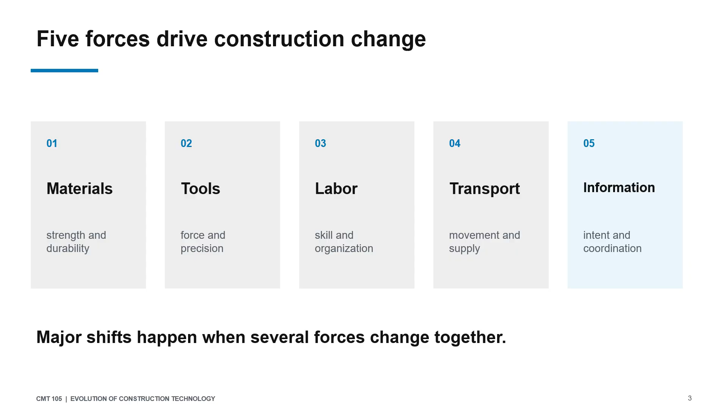All right, so let's get into the general timeline here, right? This is a pretty broad timeline. It's really not a straight line though. Construction history doesn't follow that straight line pattern, where one era just suddenly replaces another.

Ancient masonry practices are still used. I got a mason here, right? Who's my mason? Got a mason, yeah. So there's still some things you do that have been done for a long time, and it hasn't changed because you don't necessarily need something new. So we've had things that are consistent across the board.

Builders used to develop durable systems around local materials and accumulated craft knowledge. The industrial era really increased production and transportation, making components and machines available at new scales. 20th century construction mechanized, with standards and codes. I hate codes. That slowed a lot of stuff down, but that's right. Standardized codes, highways, utilities, large organizations came into play that impacted how construction had to get done.

We used to live in the era of what they called the master builder. I remember learning about this even in architecture, that it was more this master builder and master craftsmanship quality that came to buildings. Whereas once you started getting organizations like the AIA and different code officials and all these safety procedures, which are all good things, there's nothing wrong with them.

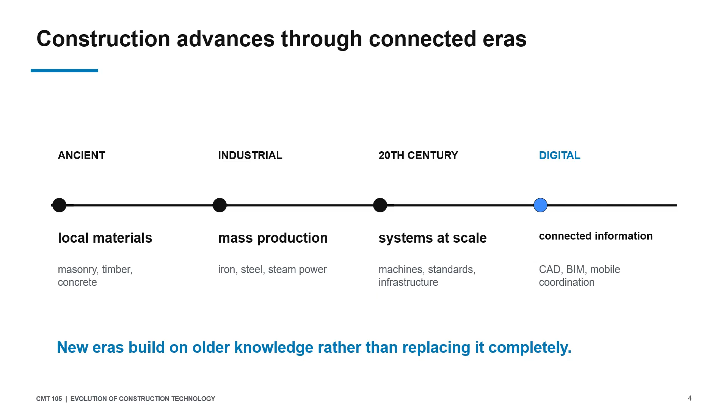So maybe some fun examples, some things you might be familiar with as we're working through here. If you don't know, this is the Pantheon. It's a powerful case in material and technological advances, right? It combines material, geometry, temporary works, and a real construction sequence. This was dedicated back in 128 CE. It still contains the world's largest unreinforced concrete dome. Kind of crazy to think about that, right? This was built a long time ago, but still is the largest unreinforced concrete dome.

It's not simply a giant mass of one concrete mixture. Roman builders reduced the weight towards the oculus. They actually changed the mix of concrete as it went up towards that big opening, the oculus at the top. They changed the aggregate. They changed the thickness of the concrete. The geometry also directs the compression through the dome and into the supporting drum, right? So there's a lot of structural engineering to this in a sense.

But even imagine this building, okay? If you've seen pictures of this, a very large building, huge oculus. Think about the complexities of that even with modern day tools, with concrete pumps that can pump concrete up to high heights on multiple story buildings. Think about that back then. They didn't have concrete pumps. So how did they move material around? How did they actually mix? They didn't have mixing trucks of concrete coming to their job site. They had to deal with it on site, right? So think about the volume of material that was used to actually do this, and what they actually had to deal with back then.

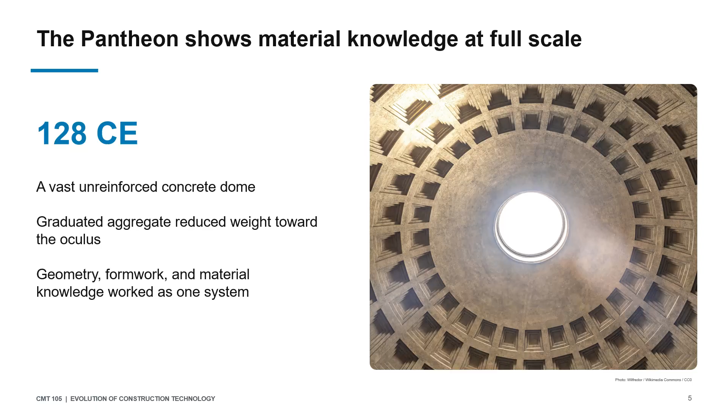The lesson here, I think, is that material innovations themselves are rarely isolated, right? Concrete enabled the dome, but formwork, geometry, aggregate selection, logistics, and accumulated craft knowledge made the concrete usable at this scale. So lots of things went into this. It wasn't just one thing. It wasn't just a material. It wasn't just one way of working. Lots of different elements played into this. And again, no computers yet. We're not there yet. Okay.

Here's just some ideas. The idea of concrete itself is always looked at as a pretty big historical technological change, right? In some of your readings, we looked at an example where MIT researched or revisited a detail that earlier observers often treated as evidence of poor mixing. They looked at these white lime clasts inside Roman concrete, and their analysis suggests that Romans used quicklime in a hot mixing process, and that process formed reactive calcium-rich features within the material.

The proposed self-healing mechanism works like this: a small crack develops, water enters, the water reacts with the calcium source in a lime clast, forming calcium carbonate, which then recrystallizes and fills the cracks. In the laboratory tests described by MIT, cracks in hot-mix samples healed within two weeks, to the point that water no longer flowed through them, while comparison samples without quicklime did not heal in the same way.

The important thing to think about here is not that we should simply copy an ancient recipe. It can really inform what's going on, but now with new technology, we're able to re-examine some of the things that worked well or some of the things that failed. With new technology, we're able to go back and study why that worked well, or why we had problems with certain things.

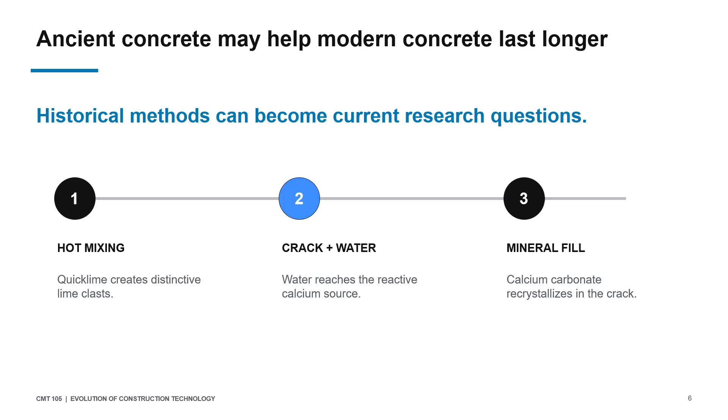Concrete can make or break a job. That's a big deal. If scheduling's not done right, if you have a bunch of concrete trucks coming to your job site one morning and your team's not ready to go, you could waste a whole lot of money because concrete is on a deadline. Those trucks come ready to go. They don't have time to sit around and wait. You can't tell them to come back tomorrow. So there's a lot of sequencing that has to go around this type of stuff too.

So, speaking about iron and moving forward into the industrial age, and thinking about how iron influenced design and shaped things over time. This is an example of the Iron Bridge in Shropshire. I can never say it correctly. This opened in 1781, so a lot farther forward than the Pantheon. It became an early demonstration that cast iron could serve as a primary structural material at an architectural scale. It spanned the River Severn using cast components produced in an industrial region known for iron making. So again, finding the right skilled labor that could actually do it.

But look at the form we've got going on here. The bridge is iron, but many of the connections resemble timber joinery. Some of that looks like stuff you would see in a wood building. Oftentimes builders understand a new material by adapting familiar forms and methods, and that can help innovation become buildable, even if later engineers discover more efficient ways to use the material. You might look at that now and think it's kind of ornate. Those joints are more ornate, more visually pleasing, where you could easily accomplish that nowadays with steel L sections.

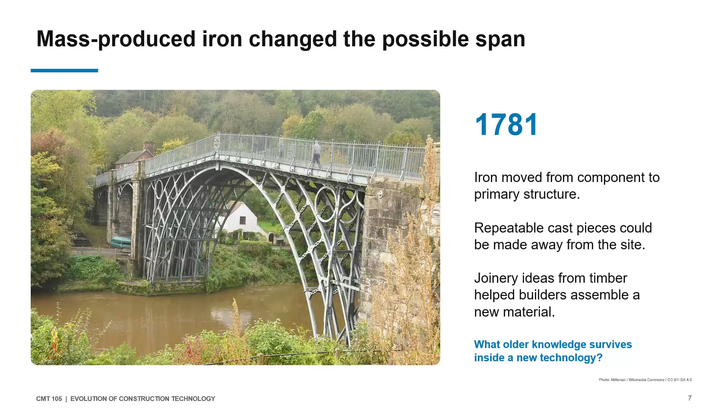Okay, questions so far? Yeah, doing good. Staying with me. I know it's history. You didn't think you were gonna have a history class in here, did you? But it's part of it. We have to understand kind of where we came from.

The big problem they had here was industrial fire risk. This was a textile mill at the time, and they always contained highly combustible fibers and relied heavily on timber floors and framing. Replacing the key structural members with iron reduced the amount of combustible structure, right? So being able to move from a lot of timber to actually using a lot of iron in here was able to help lower that risk of combustibility.

So the longer term significance here is with the frame, right? So we also now are looking at using a skeletal structure. So not relying on the exterior members to support the overall building, but now you have a skeletal structure inside the building that's actually carrying the weight of the building. Later builders could really refine that material, the connection, the fire protection, and the load analysis, eventually using steel frames to carry tall buildings, while exterior walls became lighter enclosures.

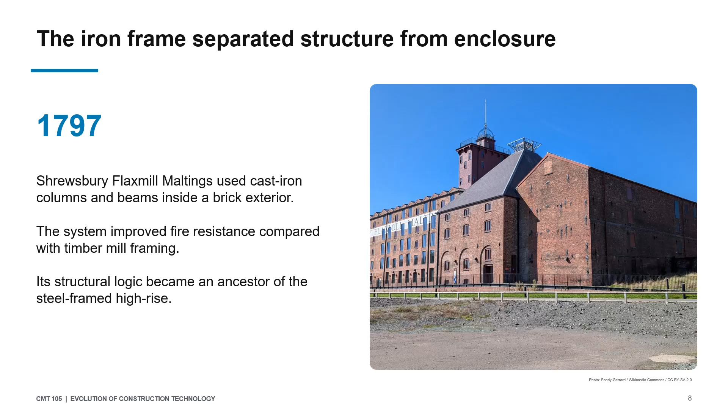So when you're looking at the written assignment, I want you to think about how some of these projects have a layered approach to the technology evolution, right? So it's not always just, now that we had software, we were able to do this. But think about some of the other things that were technological advances in that building specifically, and how it maybe changed things in a layered way of looking at it.

Okay, so this is steam power. If we're looking now at the idea of internal combustion, electric engines or electric machines changed the effort level that we have on construction job sites, right? So excavation is a clear example. When you think about hand excavation, people having to move earth and dirt around job sites requires a large workforce, and they're able to move relatively small amounts of material, right?

In comes the steam shovel when it was early invented, or now we have massive machines that can move absolutely metric tons of dirt at a time, that are able to change the way we work and move things further, right? But again, things like the steam shovel or the mechanical equipment we have today require a skilled operator, so someone has to be trained on that machine to be able to operate it.

There's still a human that's involved in that. There's fuel costs now to it, maintenance costs to it. You have to transport that equipment. So this equipment's large. You have to get it to a job site. It's not just your workforce showing up, and now you've got to get large pieces of equipment transferred from one job site to another. So that comes into play. And again, you have to make sure you have work plans that are actually suited to the machine, how it can move around the site. All of those types of things have to be taken into consideration.

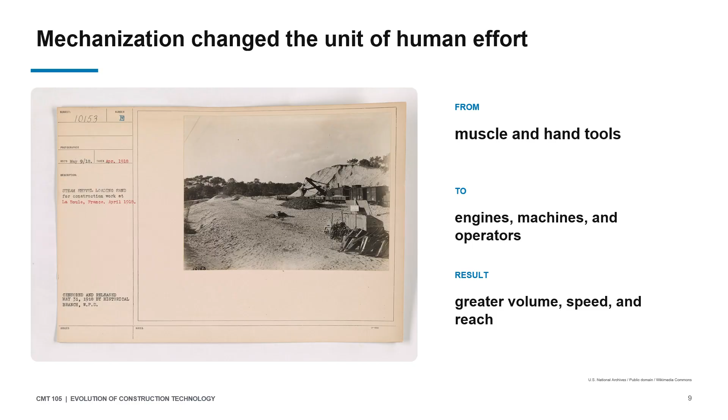So the thought there is, well, there's certain aspects, and it's with me too. There's certain aspects of my job I wouldn't mind at all if it was automated out and AI took it over or did it. There's other parts that I still want to be involved in, the output or the input in what's there. So I think that's just something to think about as we're going through all this.

Okay, here's another one. The Crystal Palace, if you don't know this one. So moving a little bit further, 1851, right? This was built for the Great Exhibition of 1851. And it really demonstrates when construction adopts that manufacturing mindset. So again, we talked about manufacturing things offsite to bring it to site. This was a great example of that. So instead of treating every part as a unique craft object, the project organized production around repeatable bays and pieces that could be fabricated and assembled quickly.

Usually for these types of things, when you're talking about the Great Exhibition, or the Olympics when they build buildings for this, there's always technology advances that happen during those times, because usually this stuff has to be built quick. They don't have a lot of time. They want to do something that really is great, but they need it done fast. So it usually drives innovation in times like that. The same thing happened here. The date of this exhibition created a really hard schedule constraint. So standardization really helped the team produce parts in parallel, which turned the site into an assembly operation.

So instead of completely doing everything on site, it was more of an assembly that happened on the site. After the exhibition was over, the building was dismantled and reconstructed at a different location, showing that the system was not permanently tied to its first location, which is pretty interesting. So this idea of a kit of parts, kind of like Lego type building construction, is kind of interesting.

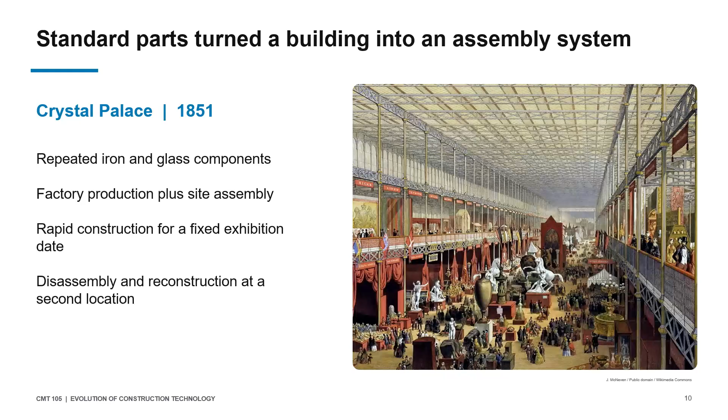So 20th century, right? Now we're starting to really connect machines, the standards that we have to follow, standard ways of doing things, and then scale, right? So we're getting more vertical. We've got these steel frames. We're introducing elevators. Imagine that. Elevators weren't a thing. Fire protection now. We get really tall buildings. We're dealing with all of that.

In the horizontal aspect, we've got large earth moving equipment. We're dealing with paving now, right? Large bridges to connect things, and then lots of logistics on that side of things. So construction technology now is increasingly operated as a connected system. In the 20th century, tall buildings require more than steel frames. They also need elevators, foundations, fire protection, enclosure systems, utilities, and codes that have to be addressed.

With dense occupancy in one space, there's large infrastructure requirements, heavy equipment, material production, surveying, transportation, public financing. Oh, there's a fun one. Public financing, or public bid. If you work for contractors, we've had so many jobs with public funding where they think it's a benefit to the taxpayers if they pick the low bid. When you go bid a project, the low bid wins, right?

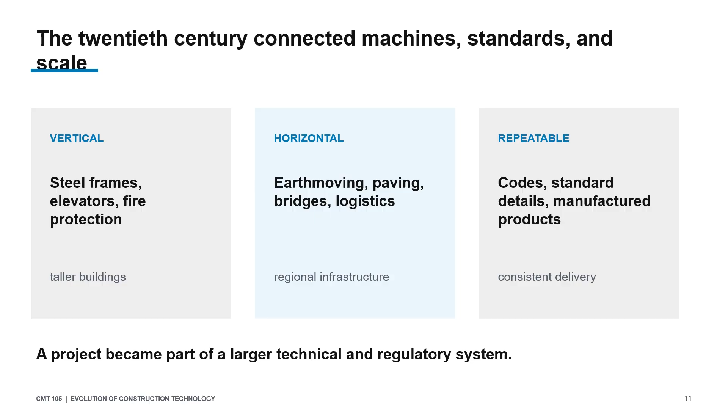So this is looking at this idea again, when information really became a construction material, right? So we go from this idea of drawings that we did manually by paper, and we're moving from that to allow ourselves to do more complex things in a more digital world, right? So we still solve complex problems on paper, and we used to do fewer drawings probably than we do now. But the idea is that we still need to produce these.

CAD just made geometry editable in digital files, as opposed to having to take an eraser and erase things off the paper, right? So CAD made it to where we went into the digital world. Teams could revise things, duplicate, add layers very easily, and then transmit those drawings in a lot better fashion, right? So we went from paper that had to be drawn on, revised, marked up, then hand delivered or delivered by, I don't know, horse and buggy, depending where you were, to now we can just email a file right to someone.

Funny enough, though, even though we have all this technology right now, we still live in a world of PDFs. It's always a funny conversation I have with people. I have all these complex models and analysis software and all these different tools we use in the process. But at the end of the day, you still end up with a two-dimensional PDF of documents, right? Really nothing different than what we did before by hand. You still end up with this state of 2D flat drawing work that gets shared around. It's just how we share it, how we develop that set, that has drastically changed from one side to the other.

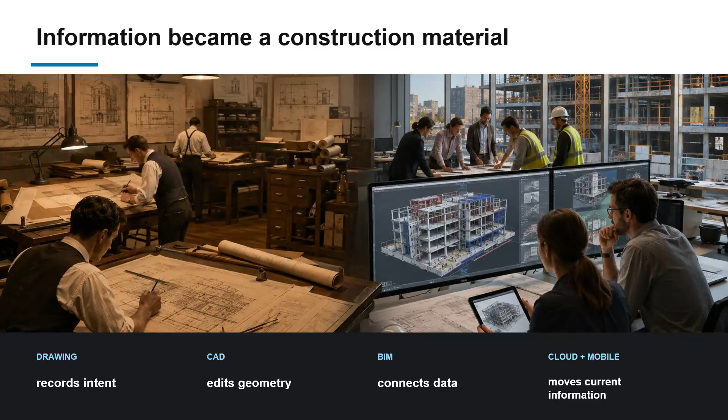I'll start losing my voice this semester, I can tell. It's going to happen, always happens.

All right. So construction technology expands capability, but the capability must be paired with protection, right? So in the historic photographs of high-rise construction, you usually see workers on exposed steel with very little fall protection, right? All these famous black and white photos of folks walking around, hanging off steel buildings, eating their lunch, that you would never think of.

There has to be shoring. There's got to be catch protection systems on high-rise buildings. Modern safety is one of those systems that plays into what we do now, right? So personal protective equipment matters. But so do the guardrails, the engineered anchors, the access planning, equipment inspections, training, how we do things, how we use certain tools, communication, sequencing, and really a culture that allows hazards to be reported and corrected.

How many of you have a safety meeting if you work for a contractor on a regular basis, right? It's a requirement. You have to be there.

Anyone watch, who's the guy on TikTok or Facebook? He's the funny contractor guy, I forget his name. I'll have to look him up. I played some videos of him last time. He always talks about the safety meetings and Ricky. Remember, was it Ricky, the guy on the construction site? Anyone know? Am I dating myself? I'm not that old. Anyways, I'll pull some of those videos up. It's fun to watch.